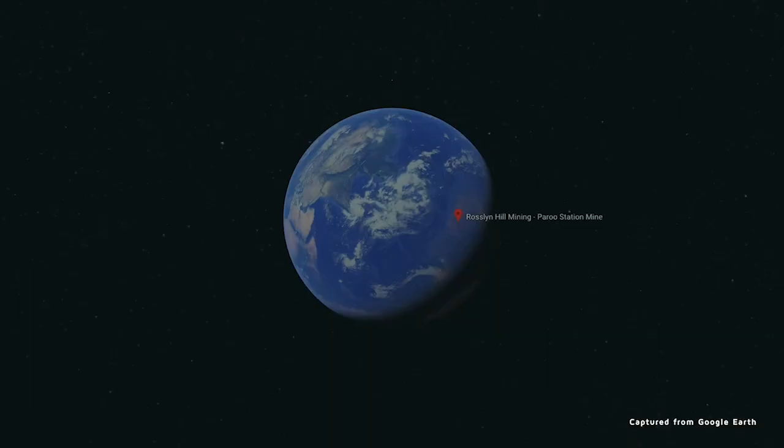Rosslyn Hill Mining owns 100% of the Paroo Station lead mine, located 30 kilometres from Wiluna and 900 kilometres northwest of Perth in Western Australia.

The mine, currently on care and maintenance, has been one of the world's most significant lead producers, with over 300 kilotons of lead carbonate concentrate being exported to overseas smelters since its commissioning in the mid-2000s.

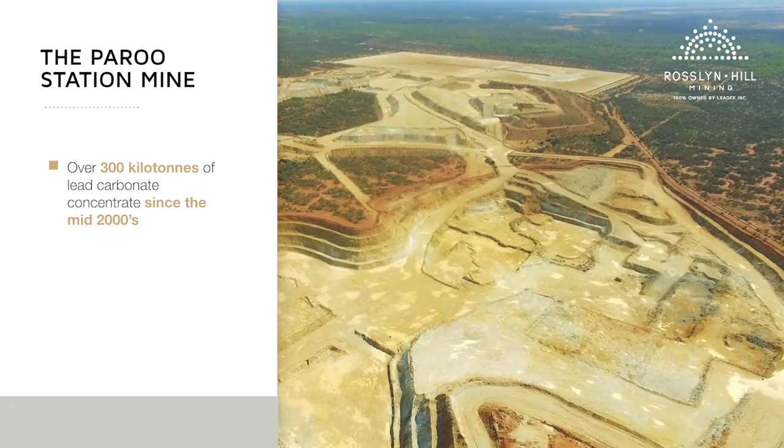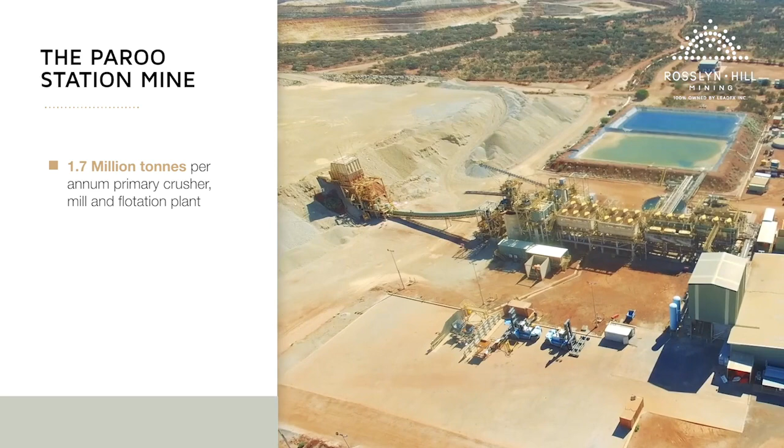The existing mine covers 450 hectares and consists of shallow open-cut pits, a 1.7 million tonne per annum primary crusher, mill and flotation plant, management offices and a village with accommodation and facilities for 170 employees.

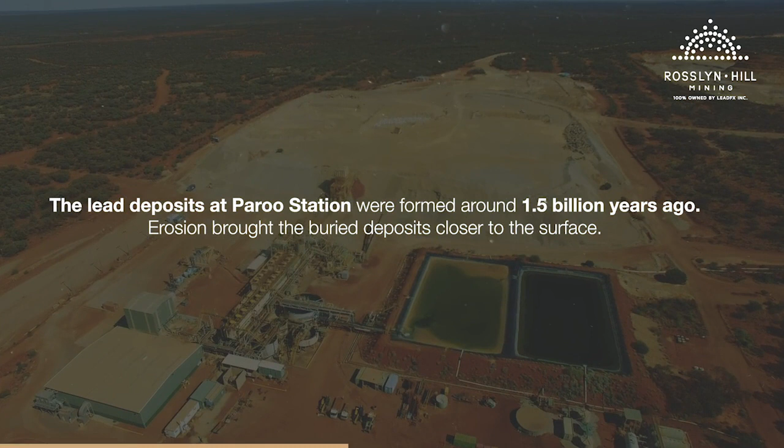The lead deposits at Paroo Station were formed around 1.5 billion years ago. Erosion brought the buried deposits closer to the surface. Over time, weathering converted the original sulfide mineralisation into a mixture of oxidised lead minerals such as cerussite and anglesite.

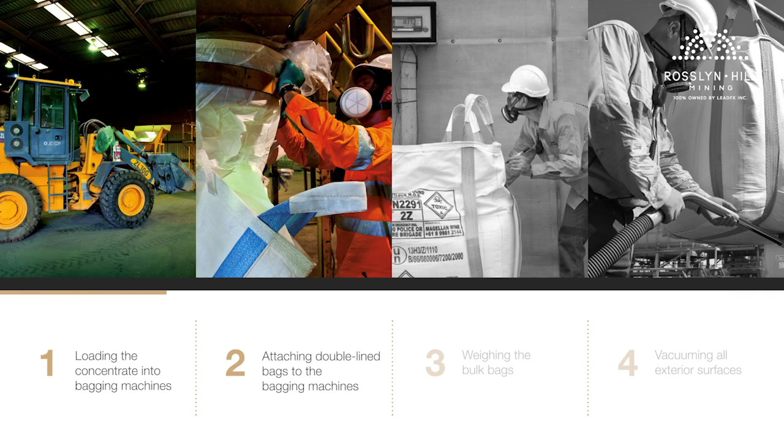Lead was previously transported from the mine in concentrate, progressing through a very intensive process of handling, packing and environmental controls before transportation to port.

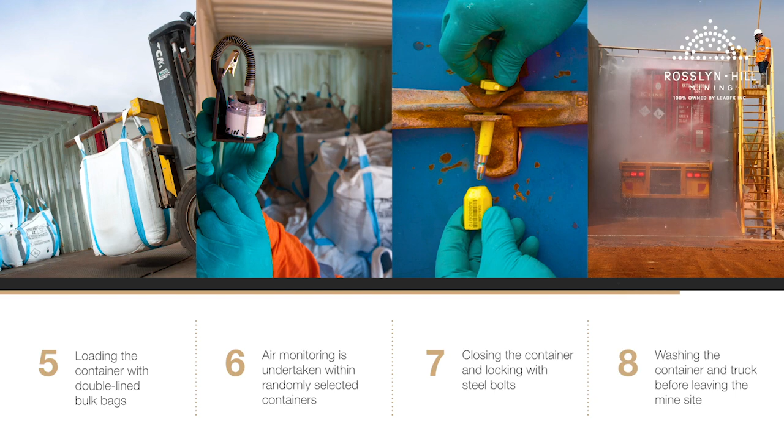Rosslyn Hill Mining is now seeking to expand the operation to integrate a first-of-its-kind state-of-the-art downstream hydrometallurgical processing facility for the unique qualities of the Paroo Station lead concentrates.

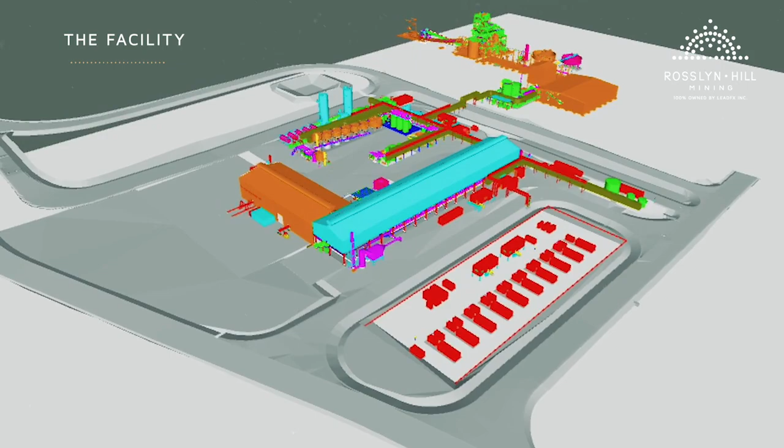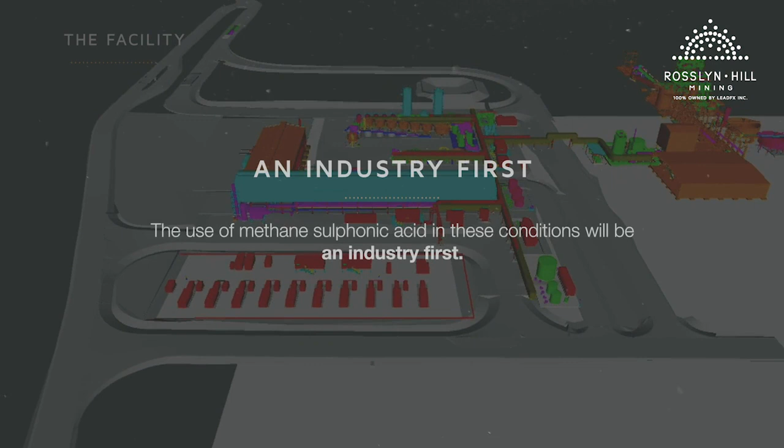The facility will utilise an innovative new hydrometallurgical technology using methane sulfonic acid to leach lead from lead concentrates and electrowinning to produce lead metal. Whilst acid leaching and electrowinning are well-known mineral processing unit operations, the use of methane sulfonic acid in these conditions will be an industry first.

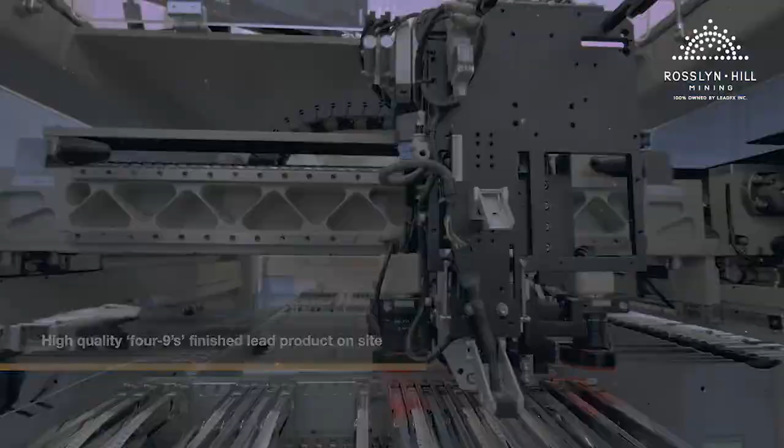The mine will produce a high-quality four-9's finished lead product on-site and export as direct feed for global battery manufacturers without further processing. The technology has been pioneered by Dr. David Dreisinger, Professor at the University of British Columbia, Vancouver, in the field of hydrometallurgy, Industrial Research Chair in Hydrometallurgy, and a company director.

In 2010, I was approached by the large chemical manufacturer BASF from Germany to explore the commercial use of its methane sulfonic acid production, or MSA as it's known in the mining industry.

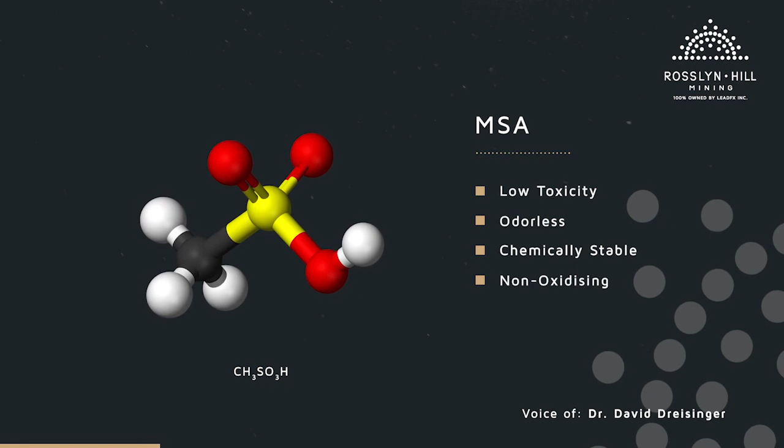MSA is an interesting chemical. It has low toxicity, it's odorless, it's chemically stable, it's non-oxidizing, has a low corrosivity, and it's fairly easy to handle.

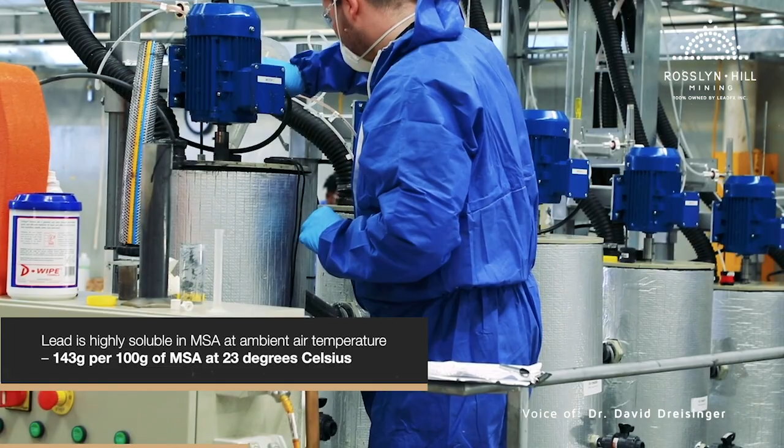It turns out that lead is highly soluble in methane sulfonic acid, even at ambient conditions. Basically 143 grams of lead for every 100 grams of MSA at 23 degrees Celsius.

Because the lead mineralization at Paroo Station is a mixed oxide type of mineralization, which is composed principally of cerussite, which is lead carbonate, and to a lesser extent anglesite, which is lead sulfate, I consider that MSA could be used as a leaching agent for these minerals to produce lead metal at the mine site through a hydrometallurgical process.

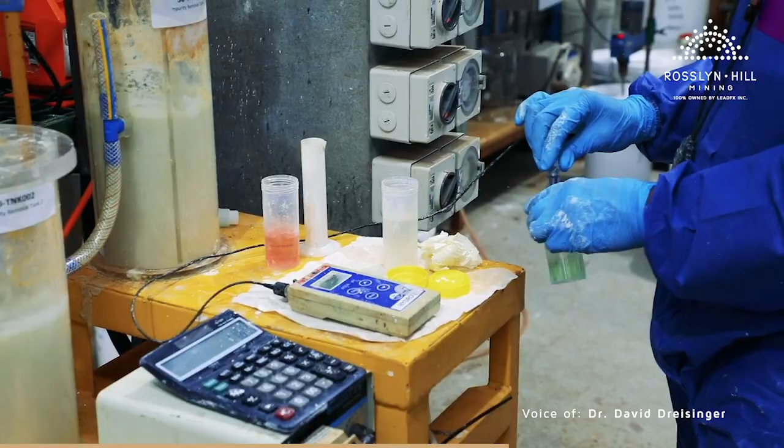By producing finished product on site, the mine could avoid environmentally hazardous and costly transport of the lead carbonate concentrates, and also the expensive and difficult smelting overseas.

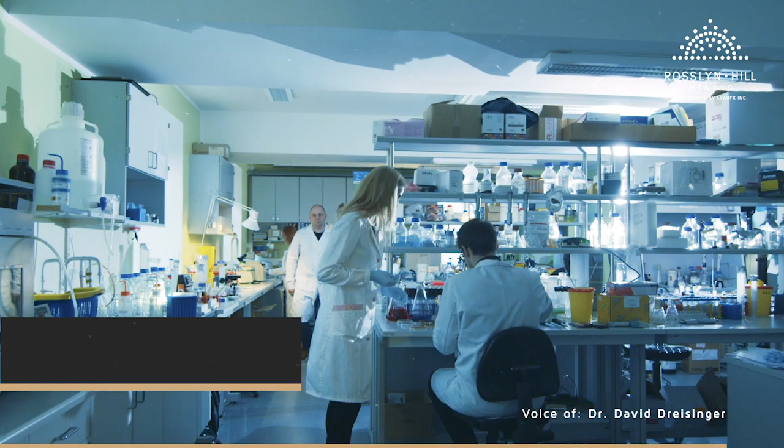Over a number of years, I oversaw test work at the University of British Columbia and developed basically a hydrometallurgical mixed oxide and also a lead sulfide technology using MSA, both of which LeadFX now own the exclusive global license to.

Under David's guidance, a hydrometallurgical process has now been developed and thoroughly tested through a full-cycle demonstration plant in collaboration with ALS Metallurgy in Perth, WA.

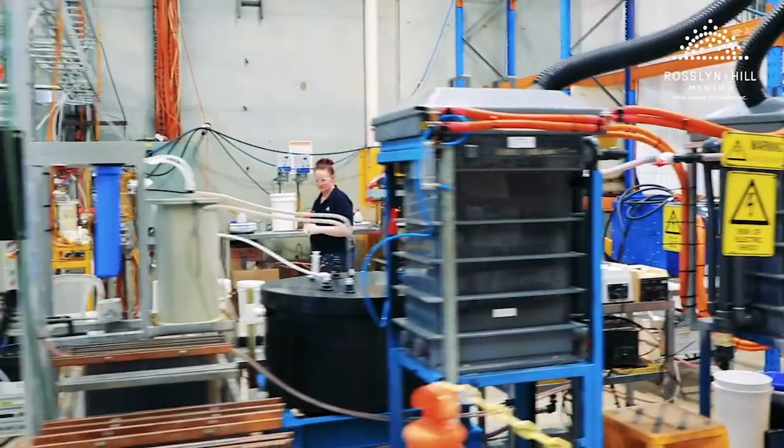4 types of ore samples from the mine have been processed through the demonstration plant, producing approximately 1 tonne of lead cathode at an overall recovery of 82 to 85%.

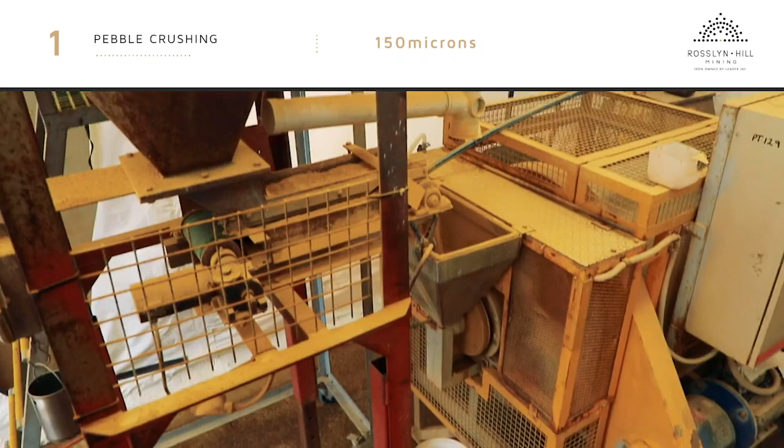The process commences with crushing and grinding of ore in a ball mill and passing through a dual screening process.

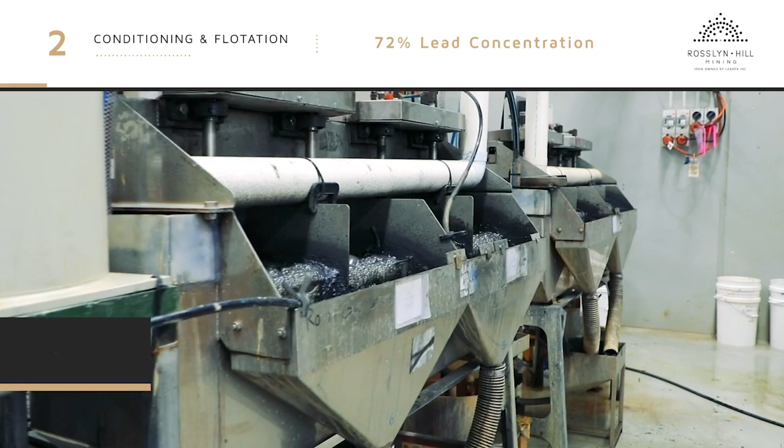The fine lead ore is then fed as a wet slurry through 4 stages of conditioning using sulfuric acid, lime, sodium hydrosulfide, and finally a flotation collector.

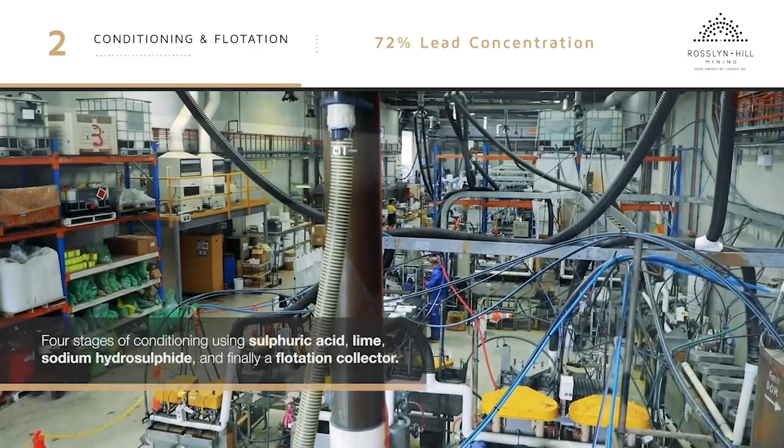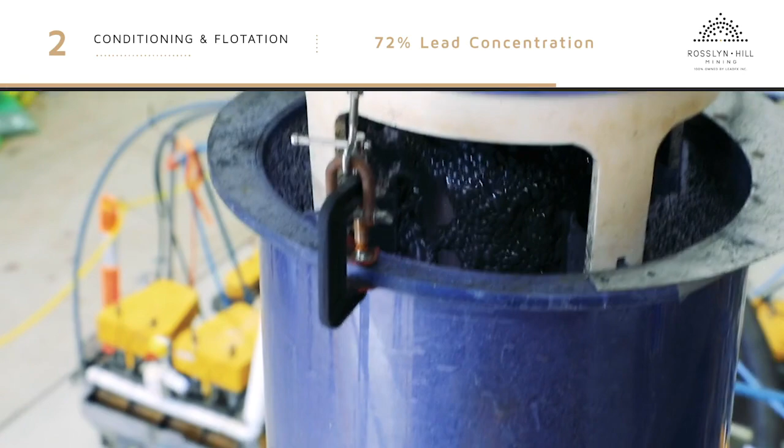A rougher concentrate is separated off and moves on to a flotation column, where the suspended lead minerals attach to air bubbles and are floated to the surface as they rise up the column, emerging as a final concentrate at 72% lead grade. The dried concentrate is then resuspended in an electrolyte solution ready for leaching.

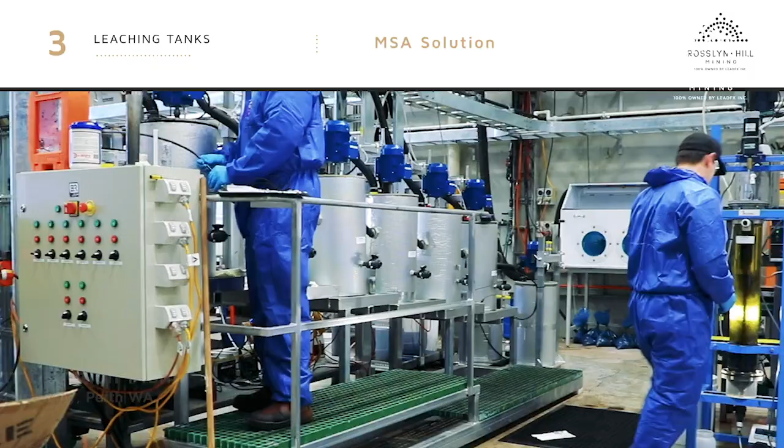The solution then passes through 6 leach tanks that use MSA to dissolve 90% of the lead into a new lead MSA solution.

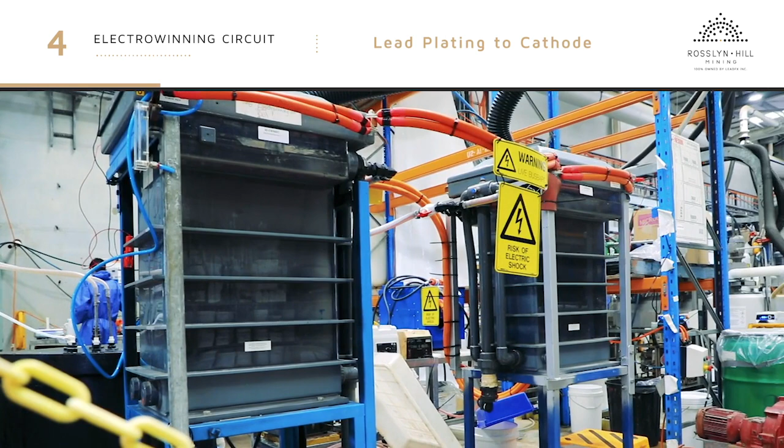Next, the leached lead solution is pumped to the electrowinning circuit within the tank house. Electrolysis draws the lead out of the liquid and is deposited on the lead starter plates, known as cathodes.

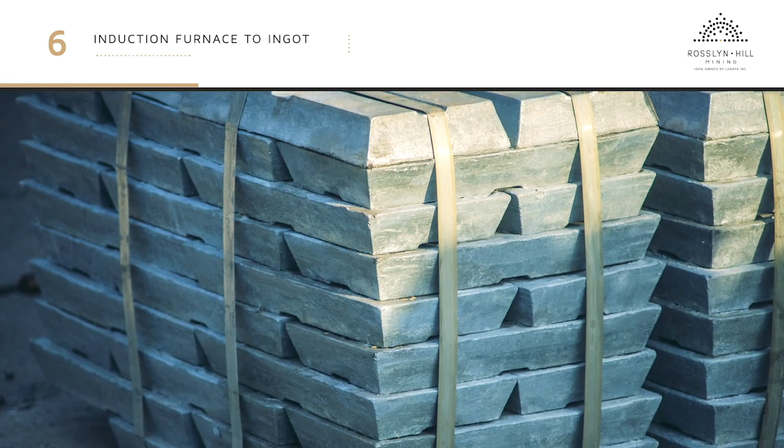The lead cathodes are washed and then melted in an induction furnace in a fully automated lead ingot casting area. The remaining 10% lead sulfate minerals are recirculated to recover the contained lead.

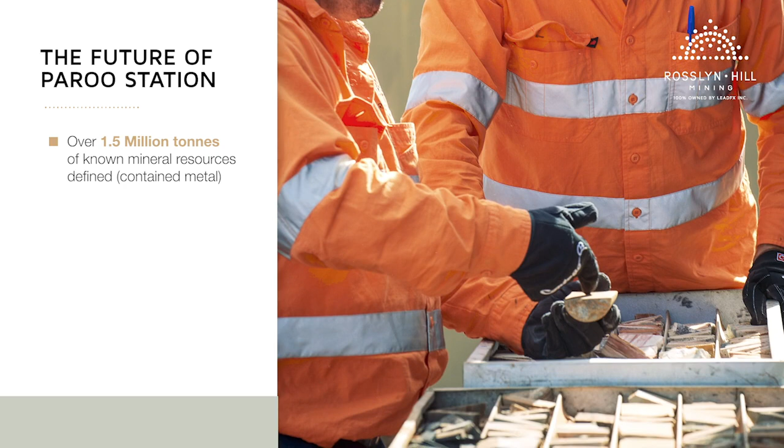Environmental approvals to build the hydrometallurgical facility and expand the mining operations at Paroo Station have been granted by the Western Australian State Government. With over 1.5 million tonnes of known mineral resources defined, there is sufficient mineral endowment to host a 15 to 20-year mine life.

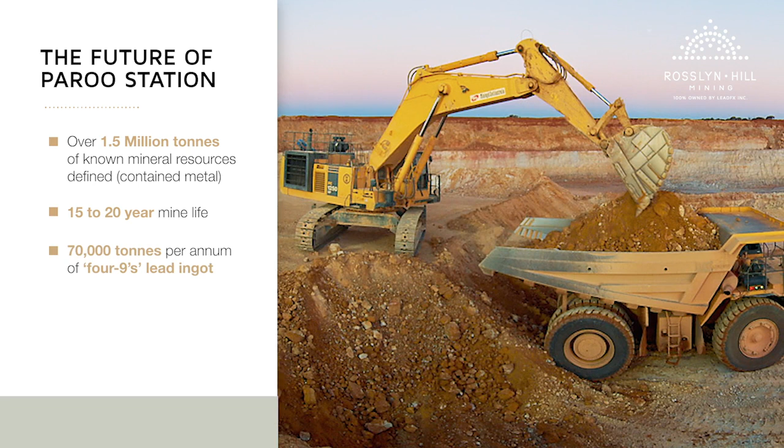At steady production, the mine will produce approximately 70,000 tonnes per annum of four-9's lead ingot at a cost of approximately $1,350 per tonne. The capital cost of the hydrometallurgical facility is estimated at $150 million and will create 230 full-time jobs in operations, plus business and employment opportunities in the local community.

The hydrometallurgical technology to be implemented at Paroo Station is an example of how research and development and innovation can be applied to deliver both positive environmental impacts and long-term sustainable benefits to stakeholders through continued operations.

Subject to financing in early 2019, we expect to be a long-term, reliable producer of high-quality lead ingots to the world's battery industry from the second half of 2020. Once again, Rosslyn Hill Mining is set to become one of the world's top 10 lead producers.